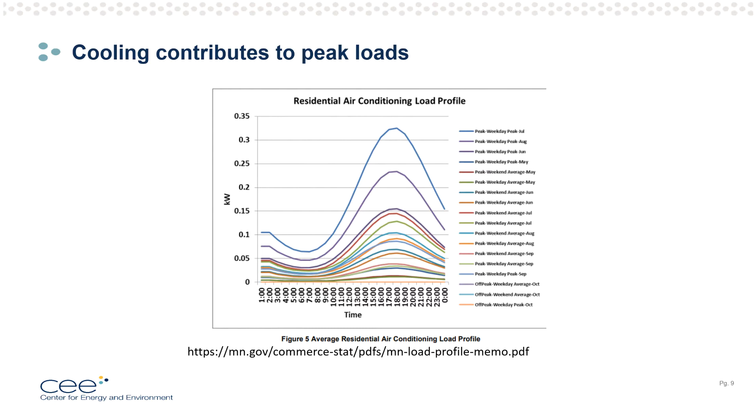Those summer peaks typically occur on the warmest days at times when daily temperatures are at a maximum and house load occupancy schedules overlap, creating a large afternoon use period in most typical homes, as we can see in this chart. There is, however, a big opportunity for efficiency, and that's another reason why we should definitely continue to consider cooling loads in our climate.

In 2018, CEE completed a DER-funded electrical savings potential study for the state of Minnesota. As part of that work, distributor sales data was obtained for HVAC equipment across the state. This chart shows the distribution of efficiency ratings for the 100,000 air conditioning systems sold per year in Minnesota. As we can see, the vast majority of these systems are sold at the SEER 13 level. That's the minimum efficiency rating allowed to be sold by the federal government.

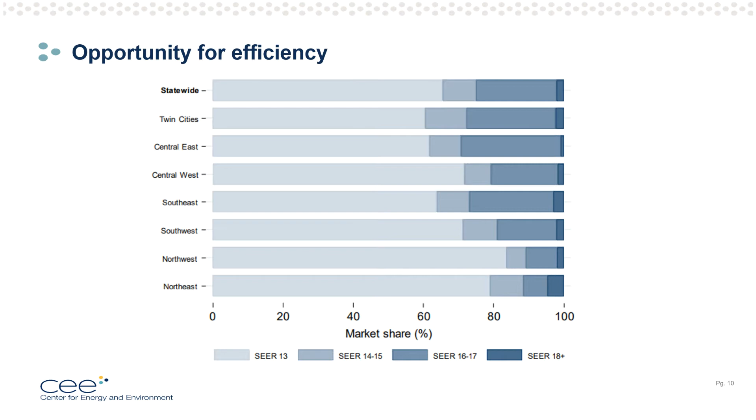Over 60% of the units sold in the state are minimum efficiency. Additionally, only a very small fraction of the market is the highest tier efficiency ratings above SEER 18. This shows the vast opportunity to move from the minimum efficiency equipment to higher tiers of efficiency. This chart also breaks out sales by region, and as you'd expect, colder regions with smaller cooling loads have a lower penetration of high efficiency equipment.

Now we can move on to a little bit of background and general discussion about cooling loads in the state. So first, just want to touch a bit on the anatomy of cooling load and how we can think of the sources for the need of cooling in residential homes. We can break the cooling load into a few categories. First, loads can either be external or internal. External loads come from outside the home and include heat transfer through the envelope, infiltration, solar radiation. Internal loads come from people, operation, lights, equipment, and other appliances and other things inside the home.

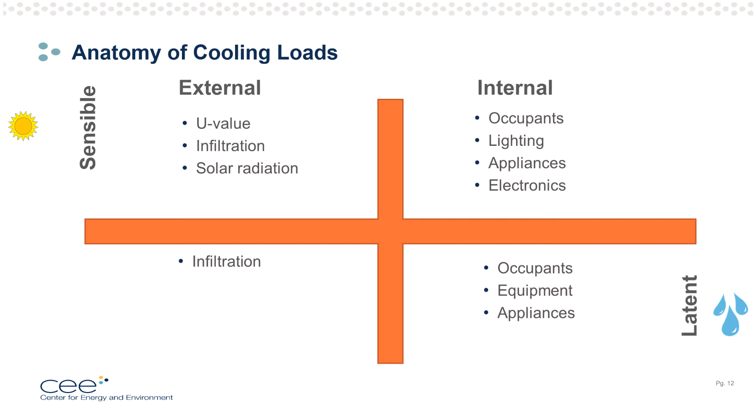We can also break out the loads by sensible and latent heat. Sensible loads refer to the dry bulb temperature and is the amount of heat that must be removed from the air inside the home in order to maintain a certain temperature. Latent loads refer to the wet bulb temperature and is the amount of energy required to dehumidify air inside the home. Location and climate obviously have a significant impact on the cooling load of residential homes.

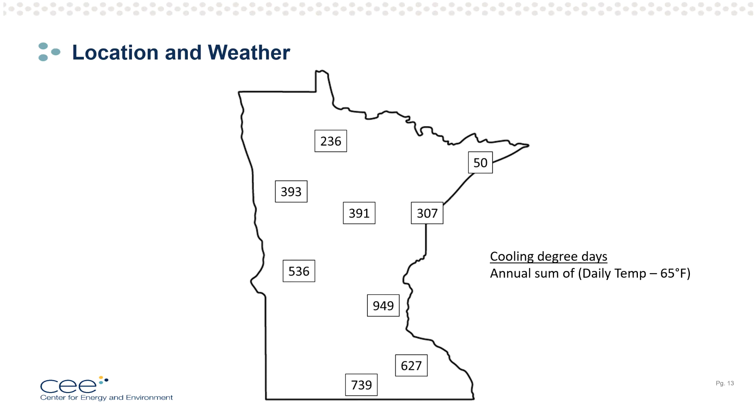This plot shows the scale of impact around the state. The numbers on the chart are the cooling degree days measured for a typical year in various Minnesota locations. Cooling degree days are the annual summation of the difference in the daily average temperature and a base temperature, in this case 65 degrees. They're a representative measure of how significant the cooling load is for various locations. We can see from this figure that cities in northern Minnesota have about half the cooling load as cities in southern locations. And we can also see the significant heat island effect in the Twin Cities area.

Because cooling loads are much smaller than heating loads in cold climates like Minnesota's, there have not been as many resources spent to understand the full picture of cooling loads in the state. There is some field data, but it is limited. We do have several sources of information that we can use to estimate cooling loads across the state. There are measures like the Minnesota Technical Reference Manual that compute loads based on equipment capacity and equivalent operating hours and use calculation to determine estimated annual loads.

The first table shows the cooling loads based on this methodology for several regions in the state and several size pieces of equipment. We can see these loads range from about 500 to 2,000 kilowatt hours per year. The second table modifies those estimates based on field data collected as part of a previous CARD research project looking at improving quality installation and maintenance practices for HVAC systems in Minnesota. This project measured actual performance from a large number of HVAC systems in the state. And we can see that using that data, the actual usage has been reduced about 25 to 40% over the estimated usage using the TRM methodology. That reduces us to a range of about 350 to 1,100 kilowatt hours per year.

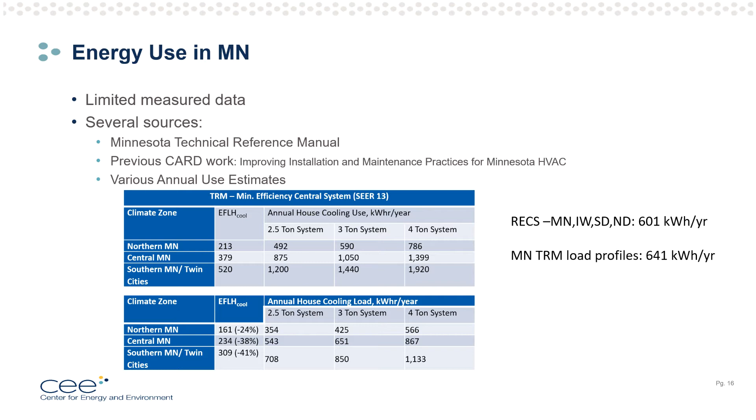We also have some additional data points around the average annual loads for the state. The Residential Energy Consumption Survey data and the Minnesota load profiles as part of the TRM both show annual loads around 600 kilowatt hours per year, which align pretty closely with that field data we just discussed. Next, we'll move on to the cooling system types.

I won't spend too much time here, but there's plenty more background information in the report. I just want to briefly mention the systems that we covered. The project generally considers as many system types as possible around AC systems analysis, but wanted to highlight the most significant systems we thought of.

The first thing that comes to mind when someone says air conditioning is a split system central air conditioner. This is the standard whole house air conditioning system that is available in a wide range of efficiency levels, sizes, and with a lot of different features. It also has a similar product in the centrally ducted air source heat pump. The air source heat pump is very similar in performance on the cooling side, but also has added abilities to provide heat to a home.

Another type of cooling system we considered that has increasing use is a mini-split or ductless system. These systems are typically smaller than the central systems and are designed to provide cooling through an indoor head as opposed to through a ductwork system. They're typically applied where there is no ductwork or the ductwork is limited in a specific zone of the house. For example, homes with hydronic heat or a new addition where adding ductwork was difficult. They are also comparable to ductless heat pumps, which are also available in the market.

We also looked at room air conditioners, both window style and portable in-room units. These systems are typically lower first cost alternatives to the more significant systems we see here, and they also tend to be less efficient, but do have some useful applications that address specific needs inside a home.

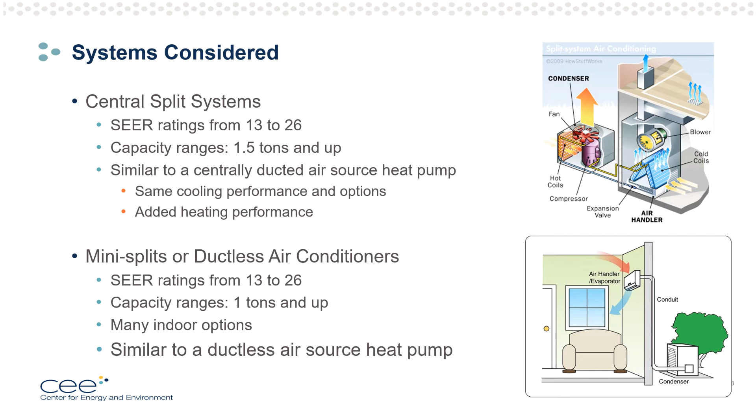So now I'm going to move on to the opportunities for savings in energy use. Air conditioning equipment manufacturers, as is the case with most HVAC industries, have responded to continued interest and need for higher performance equipment with lower energy use. Air conditioning systems continue to be developed and come to market with higher efficiency ratings. New systems are being introduced every year with higher SEER ratings. Currently, there are systems on the market with efficiencies that are 2 times that of the minimum federal allowable efficiency.

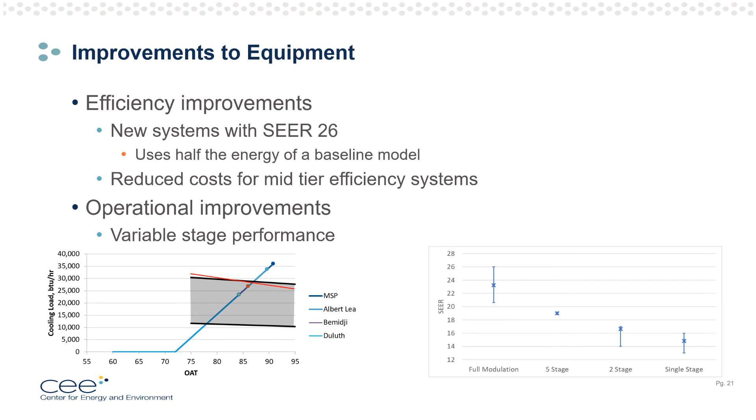Another area of innovation and advancement is in controls. We've seen an increased push from air conditioning manufacturers to develop their own smart communicating thermostats, as well as incorporating the ability to utilize third-party thermostats. Historically, programmable thermostat research has suggested that savings from these devices can diminish over time. Communicating and smart features provide a pathway to ensure that these savings are delivered in practice.

We've also seen developing controls approaches to directly address user comfort. These controls may improve energy performance as well as comfort. One example is dry, cool, or humidity control modes that address latent load and dehumidification in a home. Humidity is not directly addressed by the normal thermostat dry bulb temperature control mode, but does have a significant impact

on occupant comfort. The latent load has increased importance in lower load homes where air conditioner runtime is often reduced and the internal loads, which are often higher in humidity, become a larger and larger part of the total load. Variable capacity systems can increase runtime and improve the ratio between sensible and latent cooling. Utilizing variable capacity and dry cool modes attempts to directly address comfort needs by controlling system runtime or directly measuring the humidity level in the occupied space, as opposed to using a dry bulb temperature approach.

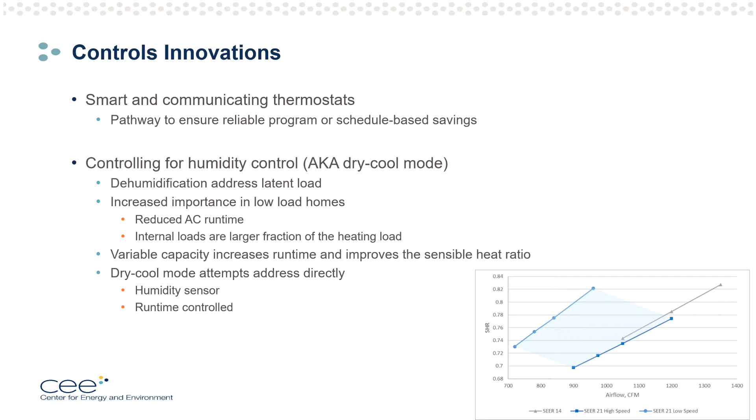Another opportunity to improve cooling performance is in the operation and behavior of the occupants that use the system. This can be broken down into how the system is operated and how the set points are used. Research in warmer climates has defined 4 user types for air conditioning systems. The always or nearly always off homes for users that use their systems only a few days a year in the most extreme heating or cooling conditions.

Set it and forget it homes for users who turn their systems on for the year, select the temperature, and then leave the temperature setting relatively constant for the entire season. Homes with a daily schedule for users that have either a programmable thermostat or manually use set points to maintain a relatively repeatable schedule. And then manually switched homes for users that exhibit more on-off type behavior. These homes you can think of as people that sort of use their thermostats more like a light switch in terms of controlling their device.

In addition to the operational modes, we also can have a big impact on behavioral performance and energy use around what the actual set points are. This is both the temperature set point that occupants feel while they're occupying the space, but also the setback that they're willing to use during unoccupied times.

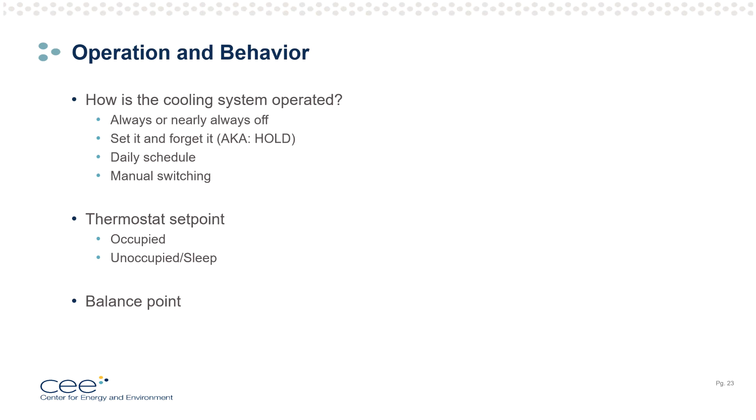The final area I'd like to discuss in this category is applications. Traditional quality installation programs have done a good job of ensuring proper sizing and good charge for traditional systems, but these programs will need to continue to evolve as cooling applications and controls change and grow. One application that has shown promise is the zoned approach. This approach involves installing a smaller high-efficiency system in a high-load portion of the home. A small Florida pilot found a 33% reduction in cooling energy using the zoned approach. But those savings are very occupant behavior dependent.

Another application worth considering is combined heating and cooling. Air source heat pumps have been a big area of research for many, including CEE. The significant improvements to the heating applications of these technologies have made them a big opportunity for efficiency. Air source heat pumps have the same ability to provide high efficiency cooling as high SEER central AC systems, with an incremental cost between heat pumps and central AC systems that's very similar when looking at systems with similar

specifications. But air source heat pumps have the additional savings potential in the shoulder heating seasons, where air source heat pump efficiency can be as much as 5 times greater than a traditional heating system. And for homes with electric or propane heating systems, there are heating benefits over the vast majority of the heating season.

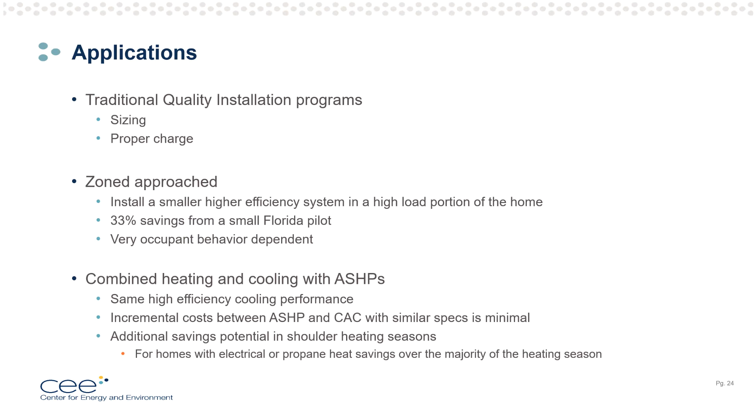So I'm going to spend a little time talking about barriers. By far the biggest barrier to high efficiency cooling to date is first cost. High efficiency systems are expensive and have limited penetration. This table shows some national first cost data from the NREL Residential Efficiency Measures database for central split system air conditioning systems. These costs are likely lower than costs that we might get quoted by individual local contractors, especially at the higher efficiency tiers where local contractors have a very limited number of installs and experience with these systems.

Cooling loads are relatively small and inexpensive in Minnesota. Energy use ranges from 500 to 1,500 kilowatt hours for central systems across the state. If we assume a 30% savings, that's anywhere from $16 to $50 per year at 11 cents per kilowatt hour. Even using that high level of savings, that would be about a 10-year payback for most cases.

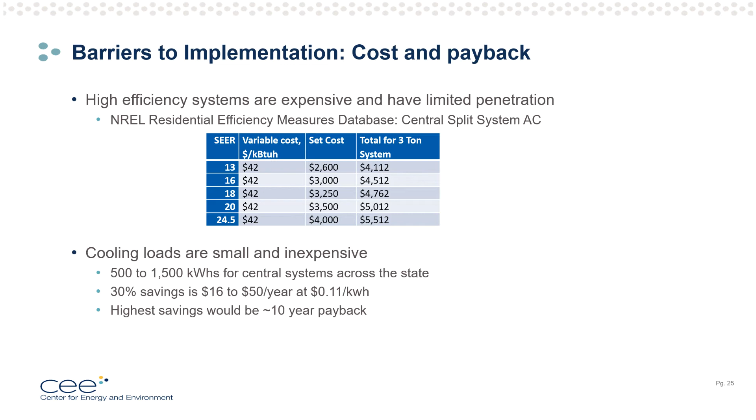Beyond cost, there's a few other barriers that are worth highlighting. Availability is a barrier. Contractors don't try to sell these systems, and homeowners don't ask. As we discussed earlier, about 70% of the systems being sold in the state are of the minimum efficiency level, and the remaining systems are mostly in the mid range, SEER 14 through 16.

Quality installation, as we mentioned, is very effective for getting good installation with current split systems. But as more advanced features like zoning, controls, humidity, and different system types such as mini splits are added to the market, quality installation programs will need to change and evolve to meet those needs.

Rebate programs and approaches are changing for cooling systems. Even over the last few years, some Minnesota utilities have dropped or reduced air conditioning rebate levels. Others have increased air source heat pump rebate amounts. In some cases, this shifts the preferred system for contractors due to first costs.

We have anecdotal evidence that more than one contractor in the state has chosen to install air source heat pump systems instead of central AC systems because the air source heat pump system had a lower first cost after applying rebates for a local utility. These applications aren't even considering using the heating capabilities of the heat pump. They've just chosen the system mainly out of that lower first cost.

While this isn't necessarily a barrier, as heat pumps can have very high and very good performing cooling systems, it's a change to how we think about cooling and presents a barrier for implementing these types of programs.

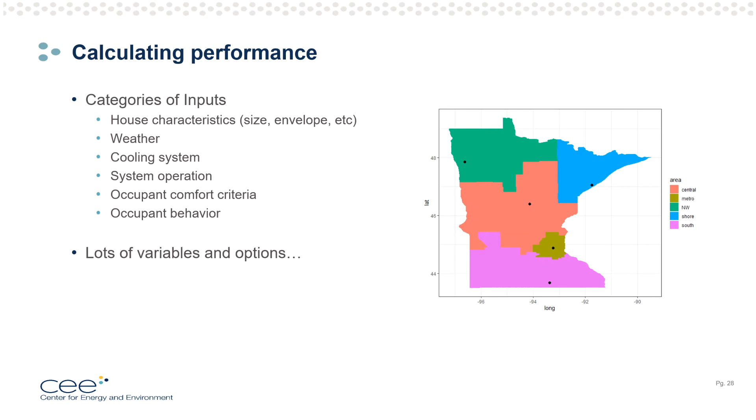And when we take all those things in and we consider it, it's a huge number of combinations and lots of options to look at with all these variables. So in order to assess all these various impacts and opportunities for air conditioning, we've built an Excel tool that I'd like to do a brief demo of.

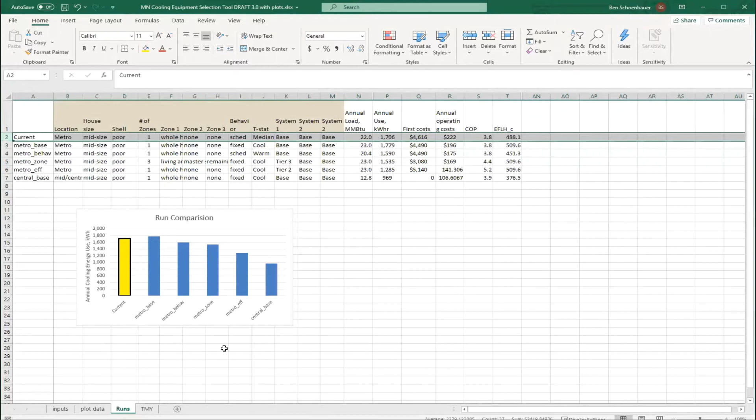Once we've input all of our desired inputs, we can look at those outputs, and then we can move to the Runs tab. On this tab, we can see the current set of inputs and outputs in the first row, and we compare those to some historical saved runs in the tool. You can see there are a handful that we've run in this iteration. We can also see at the bottom here a chart that shows the overall annual usage of the current run compared to several of these historical runs.

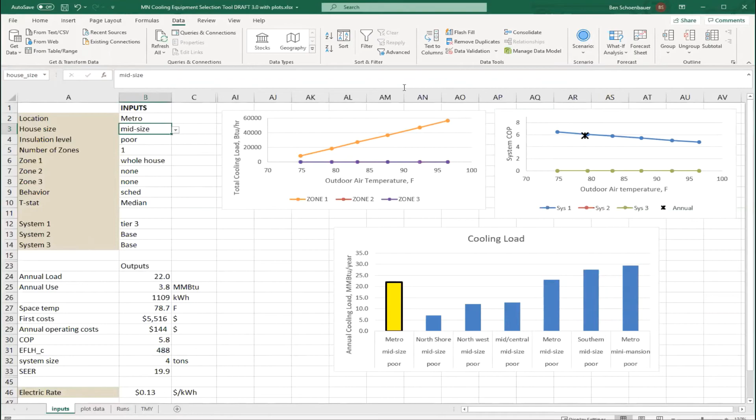So now that we've walked through a little demo of the tool, we'll spend a little time talking about some of the examples and highlights of running results in that tool. There will be more information, examples and highlights in the final paper, but I wanted to share a few today.

The first area we examined with the tool was the efficiency paybacks of higher SEER equipment. This slide shows the results from running a scenario where a central air conditioning system was replaced with increasingly higher tiered solutions with increasing SEER for each choice. Each set of colors in this symbol represents an application with this series of increasing SEER systems. Increasing on the y-axis means that the system has increased simple payback. Moving to the right on the x-axis shows increasing cooling load.

So if we take an example of a large metro area home with poor insulation or thermal properties, as we can see with the blue triangles. In this example, when comparing to a baseline minimum efficiency system, we can see that the options for the SEER 16 and SEER 18 solutions have simple paybacks of less than 5 years. As we move to the higher tier systems, SEER 20 and SEER 24, those simple paybacks increase due to the higher first costs of those systems.

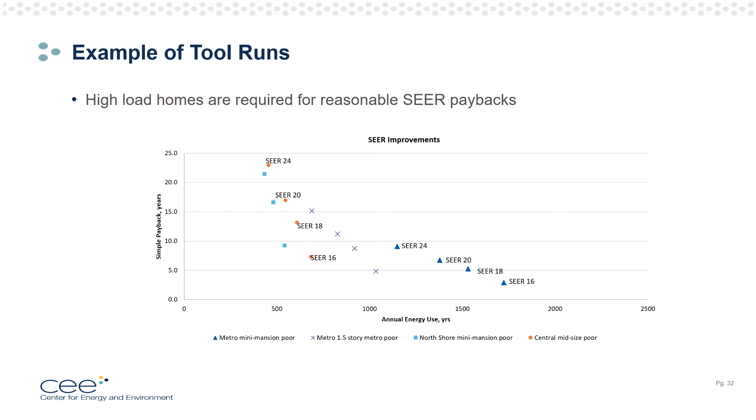Another example from a set of options run through the cooling calculator was opportunities for zoned application. In this example, we're looking at results from a home without a central system that is considering adding cooling. The first row shows the base case using only a window AC in the master suite. It then compares to a whole house application using higher efficiency systems in the more important zones and less efficiency or no cooling in the lower use zones. This table highlights on the subsequent runs that these zoned approaches can provide lower annual operational costs and/or lower first costs.

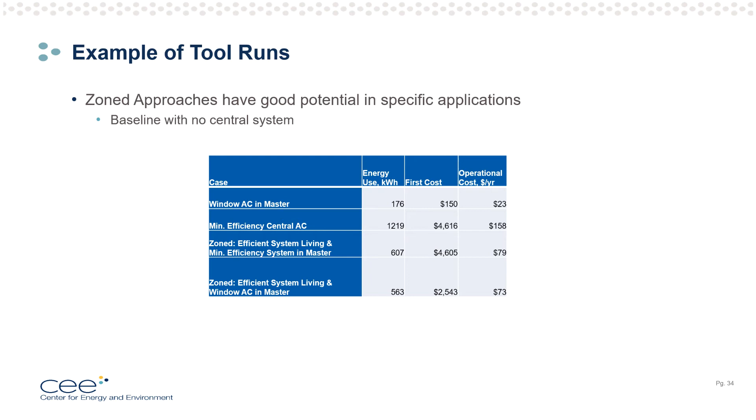So as we conclude some of the high-level summaries from the tool, I should also say that as part of the final report, this tool will be made available for people looking to run their own scenarios and their own set of considerations through the tool.

After having run a large number of applications and conducting the research for this project, developing the tool, and then using the tool to evaluate a large number of iterations of inputs, we have a few recommendations that we think should be considered for achieving cooling savings across the state.

The first area of recommendations is to consider savings methodologies that allow more flexible approaches beyond simple SEER improvements. This will help address some of the additional opportunities discussed today. This could be through a more complex tool like the one we've demoed, or through direct measurement or some other sort of program structure. The second area to consider is how addressing combined systems and applications can benefit cooling opportunities.

We've briefly discussed the potential of air source heat pumps to provide both heating and cooling savings, but there are additional combinations such as cooling and dehumidification or reduction of the overall heating loads through improved envelope performance. These opportunities are not without challenge, but have potential to overcome some of the barriers for high efficiency cooling.

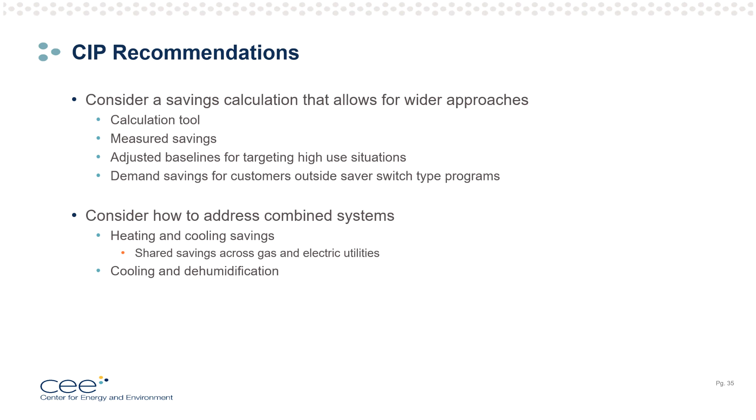So I wanted to leave you with some high-level results that we found from this project. Cooling installations in Minnesota, in the region, and in the nation are growing. Individual system loads are small, and traditional efficiency opportunities, such as increasing SEER, often have long paybacks. Occupant behavior and system operation have a large impact on energy use.

Individual installs have low loads and can have high first costs for high efficiency systems, but due to the large number of installs, aggregate impacts have a huge impact on energy use and demand. There are lots of opportunities to reduce loads and energy use, but they require more specific applications-based approaches. Additional work is needed to outline best practices and program guidelines.

Examples for additional work include further characterization of actual use and system performance data, evaluations of new opportunities such as combined applications, dry-cool modes, zoned approaches, and several others, considering ways to promote thinking beyond just the first cost, and market-based approaches to reduce those first costs.

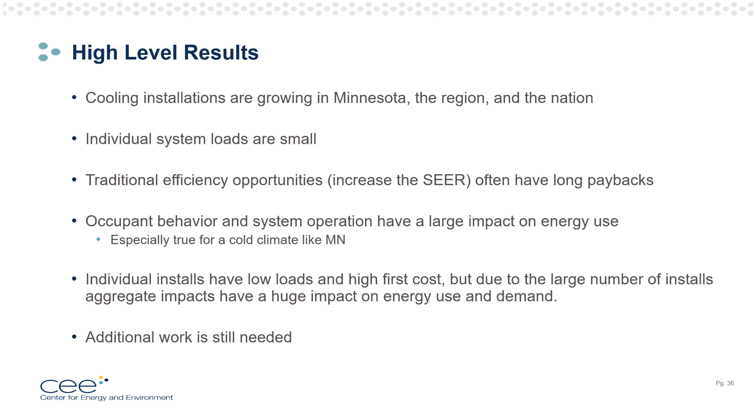And with that, that kind of completes the prepared remarks. As I mentioned, a final report that has more detail on lots of these areas, and the tool will be made available in the future. And I think we have some time for some questions.